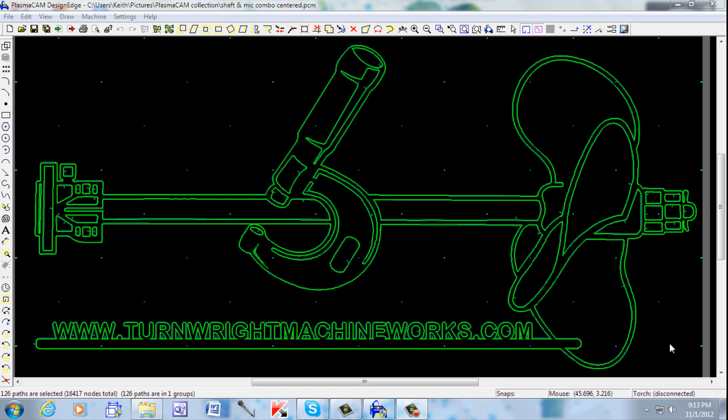Nesting 1, 2, 3. Welcome to my PlasmaCAM screen once again. I have recently acquired the nesting software for the PlasmaCAM to complement the DesignEdge software put out by PlasmaCAM itself. And I'm getting acquainted, getting warmed up to it, and decided to bring you along.

Alright, we're throwing a little twist into the video here. I've actually come out to the shop now and installed my video software on my computer that I control the PlasmaCAM with, so that in the future, when we get rolling on the nesting and an actual cut preview of this subject, I will be able to accommodate that action.

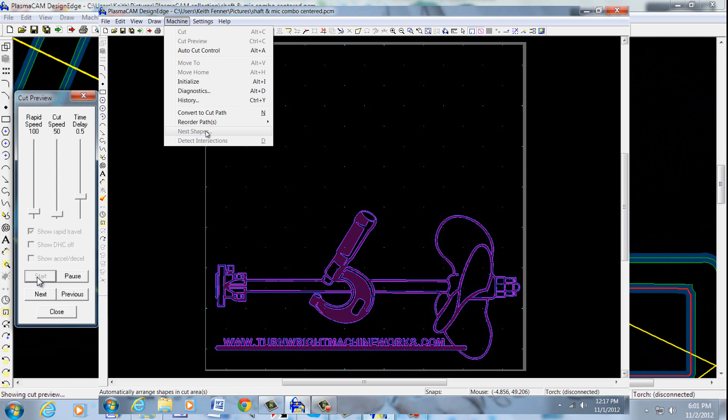Alright, let's get to opening the control panel for nesting shapes. Now you have to have something to nest or to play with before you can actually open up the nesting control. I'm just going to show you this for instance. Up here in the menu, machine, you come down, there's Nest Shapes. And it's not highlighted, and I can click on it all day long and I'm not going to get it open. Alright, but if I pick my cutout here that I have, I come back here and it's highlighted, and when I click on Nest Shapes, the window opens.

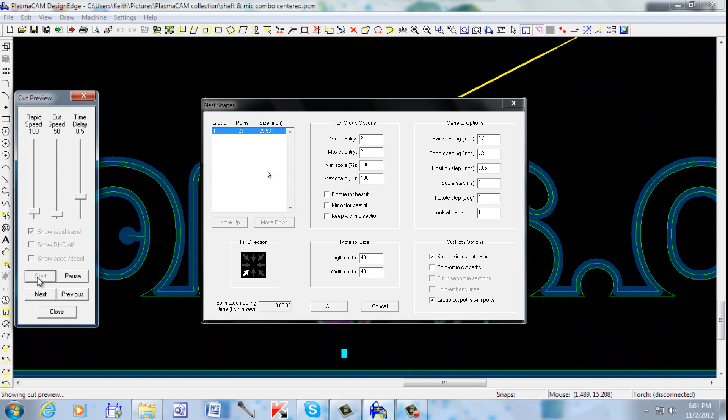Alright, let's cruise the options that we have in the nesting software, and I hope I can get through this pretty soon here. I have a hard time controlling the mouse and running my mouth at the same time.

This window right here is where our items are listed. Okay, now we only had the one item, our logo, to cut out, and so there's only one item that was brought in here when we initiated the program, and it's group 1, and it has 126 paths, and it's 29.53 inches in size. And each item that you choose to incorporate in your nesting project would be here. So if you had more than one, it'd be group 1, group 2, group 3, so on.

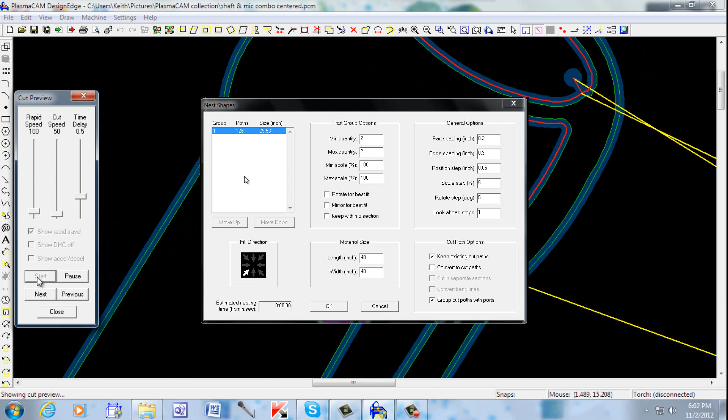And it would fill the box all the way up and down. You'd be able to scroll this depending on how many you got. And it would also initiate the move up and move down controlling. This is pretty much a window that's basically the same as most photo entries into photo galleries on websites and so on. Alright, let's go to the next section here, which would be part group options.

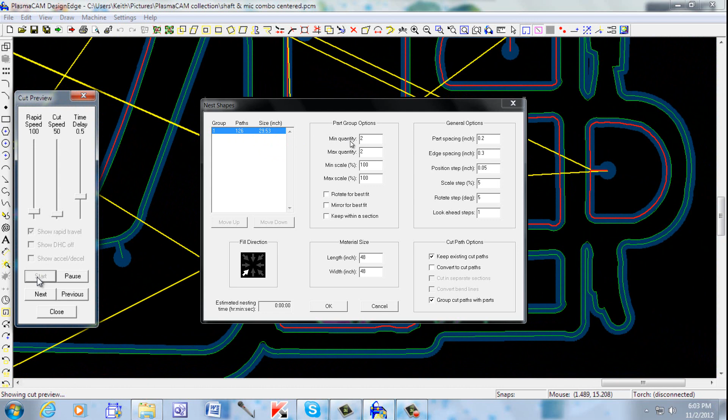And this is the first place you'd go that pertains to the individual highlighted parts or groups over in this window here. So that's highlighted there, and we would put in the minimum quantity. The minimum quantity would be the actual quantity that you would want to cut out of your sheet or your plate or your specific piece of material.

Alright, max quantity would be the most parts that we'd want to be cut out if we had room to cut those out, meaning there's more material than our minimum 2 pieces, so if there's room, hey, why not? Let's go ahead and let's cut 4. That would be an example of max quantity. You got room on your plate, and it's not going to hurt to have a few more pieces.

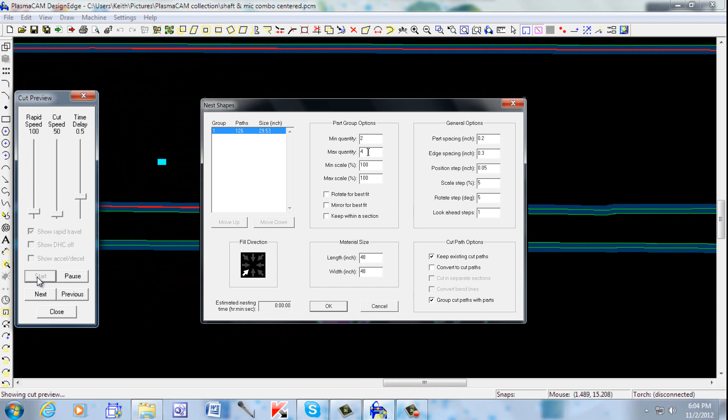Or also, you might have a piece of plate up there, and you don't know if you got this or that amount there, but it's kind of close or borderline, and you can go ahead and set those max quantities a little bit higher, and when it goes through the process of actually organizing and getting it on there, sometimes you can actually see that an individual oddball may fit and may not fit. So sometimes if you're going to be close or borderline, I find that you can go ahead and give yourself a couple more, and they may fit in there even though you may not have thought they would.

Alright, minimum scale would be a percent, and you see the percent symbol there, of the full 100%. 100% listing in this box right here means that you're going to cut it out at your original planned dimensions, as if you were cutting out the single piece on the table all by itself. If you want to keep those exact dimensions, you would leave it at 100.

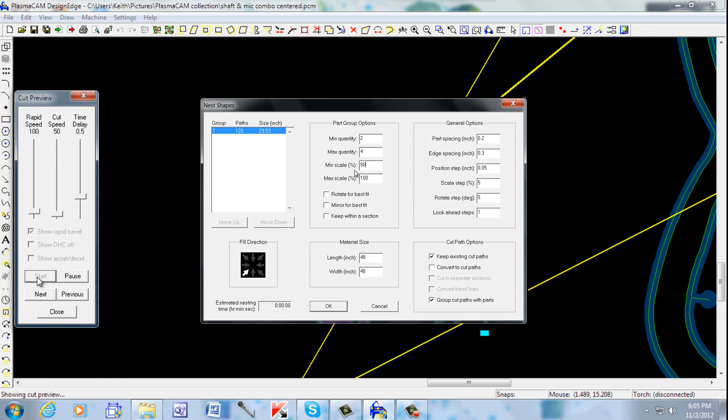But let's say you actually could sacrifice your full scale, and then you could enter, say, 90%, and it would make your parts smaller, and then you may be able to fit exactly what you want. So if you can sacrifice your full scale down, you may be able to get more pieces in that certain area, or if you just really wanted to shrink them down. But I would probably say that minimum scale would be to sacrifice a little bit of original size to squeeze more in on a certain area.

Now max scale would be just like minimum scale, that 100 would mean true size as the original that you are trying to nest.

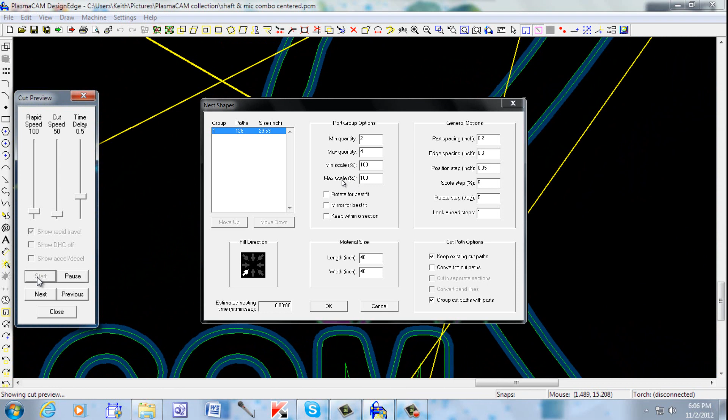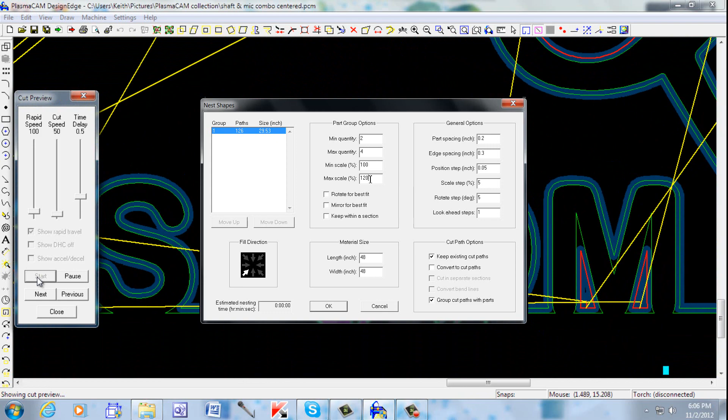All right, and if, let's say you had a single part or multiple parts that you could or wanted to increase the size because you had room to play with, you could make them larger by just going ahead and increasing this to 120% or so on, to suit how much you actually want to grow that part onto the screen. And what's nice is you can type in this, and then you can hit OK, and you can go to your screen there, and you can check all the parameters there as it's going.

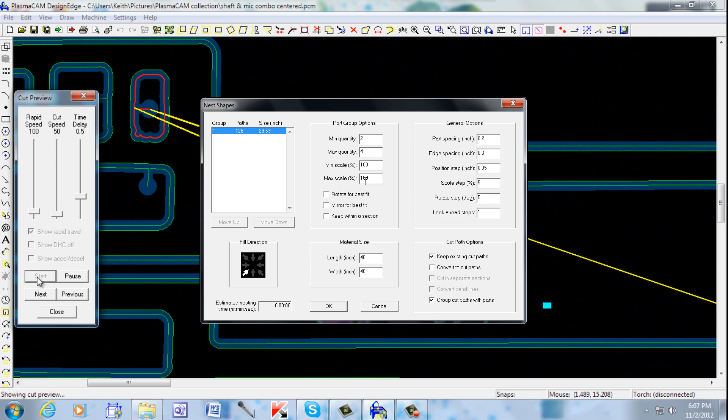But for right now, we're just trying to cut multiples of true parts, and we're going to leave both of these on full scale or true. I'm going to say true scale. We want parts to remain the same as we drew them to begin with.

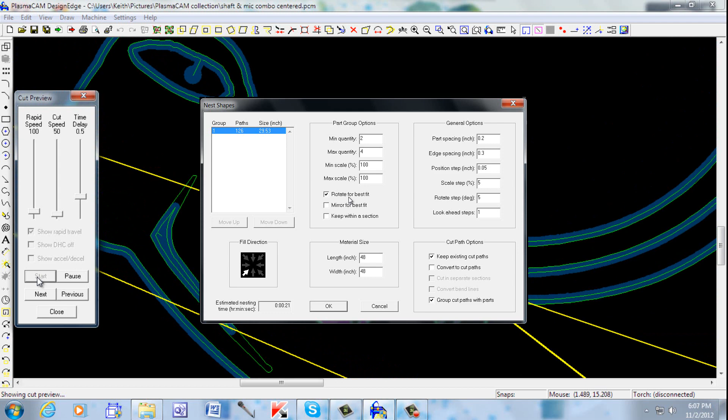Okay, rotate for best fit actually gives the program permission to spin any of your objects, any of the copies of the objects that you have on the flat surface in a direction to interlock them, and it decides its best position to put those so that you are getting the least amount of waste between those parts.

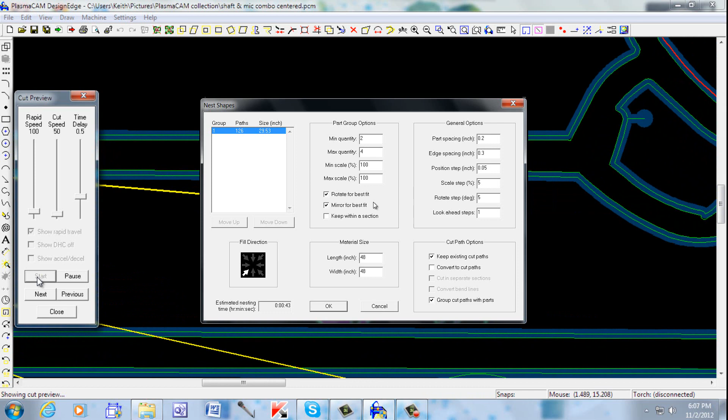Alright, mirror for best fit. When you check this, that lets the program take and flip the part over, basically a mirror image of the original drawing. And some things can perfectly be okay cutting a mirrored object, and when you flip the part over, it doesn't matter which side of the part is up or down, because when you get done cutting it, you can flip it the direction desired, and there's no harm.

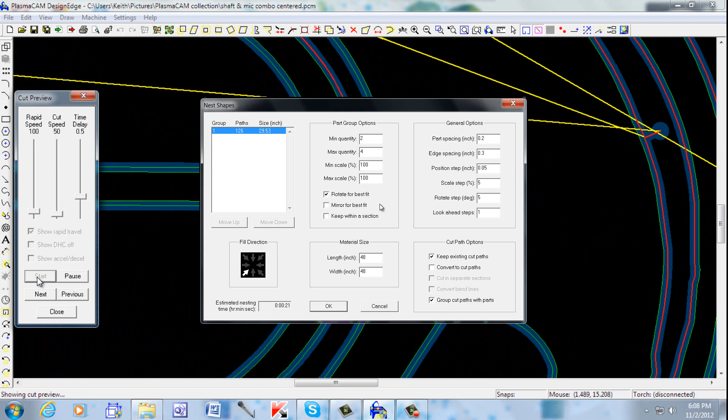Now if you had diamond tread or text or lettering, mirror image may throw a catch in your get along there, and I would advise not to run that highlighted. Alright, just a note, it can save you room and material, but it also can cause you heartburn if you're going to cut an opposite image of what you're trying to cut out of something that's surface sensitive, meaning one side of that plate does have to be facing up.

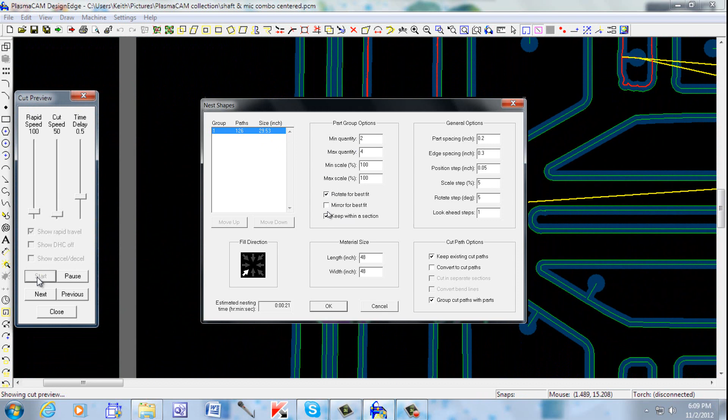Alright, keep within a section. When you check keep within a section, your parts that you have highlighted and your quantities and all the goodies there and how they're rotated and all that will stay within a section. And a section has a couple different definitions to it. Your section could be the 4x8 or the 4 foot by 4 foot table size,

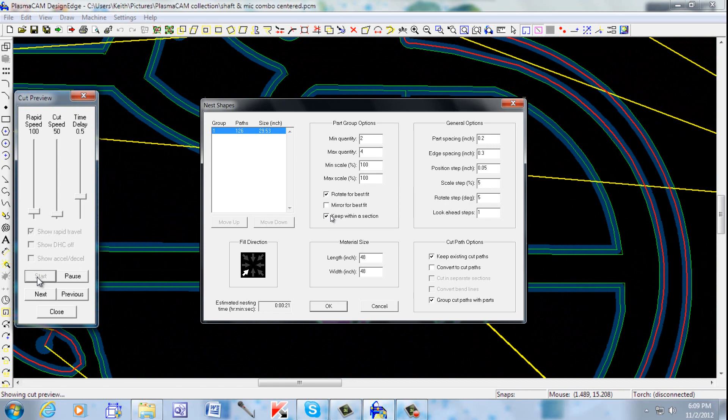and also, if you were to have a void or a cutout in a piece of material, you can put a blockade up, and you can control that section. So when you check this, you will be able to confine it just to a section, and you're cutting parts. You won't be trying to cut parts over voided areas or off the table.

Alright, let's swing over here to the left. Fill direction. Now there's a little arrow down in here, and of course you can click it at any of these areas right here, all the way around in a circle. And these are directions that you can fill, meaning start along that edge, start in that corner, and fill the table from that direction, from the corner out in the direction the arrow is pointing.

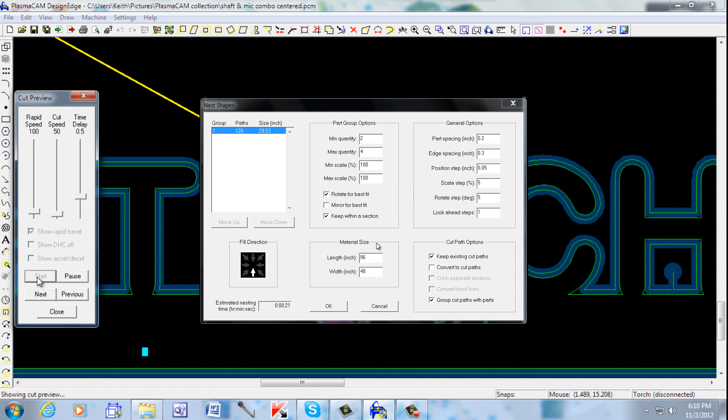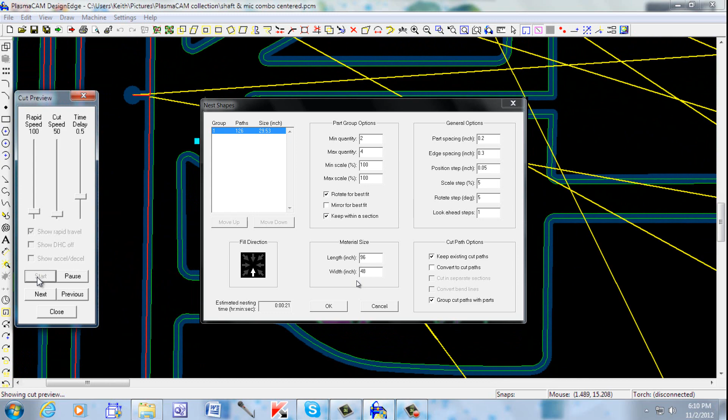All right, let's talk about material size, and you can change this to fit any size piece that you actually can throw on the table. And default had 48 by 96, but I have put a number in there playing around, and I'll be doing that here when I give you a demo on some other parts, that you can confine it to a piece of material, say like a 12-inch wide by 3-foot long piece of material, and you can put that on the table and you could type those dimensions in here, and it's gonna hold your array of parts into that confined area.

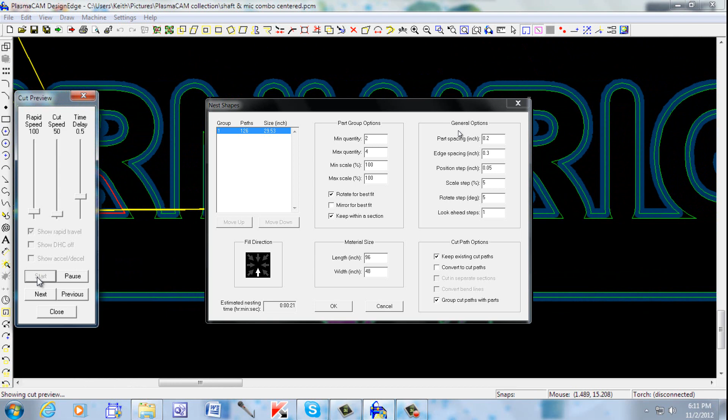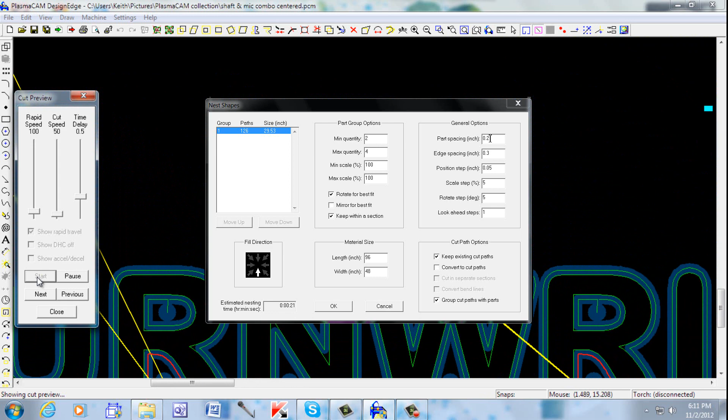Alright, we're up here at general options now, and these are the options that kind of lump all the other parts that are going to be nested into their final resting place. And the first option is part spacing, and this is a default setting of 200 or 0.2. They don't carry it out 3 places, so it does have plus or minus or whatever. You would normally think that way with 0.2. All right, and we will get into close shots on the screen, and I will be showing you what you can expect with a 0.2 dimension there on part spacing.

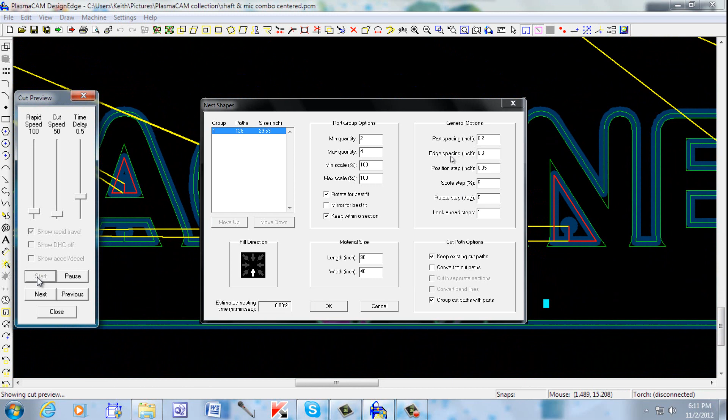Edge spacing, and they have in here 0.3. Edge spacing is the parts away from the edge of the table, or the parts away from the edge of the within a section area, or the material width or size. So the edge of your material into the nearest part, or the first part near the edge, would be edge spacing, and that's 300 thousandths was default setting.

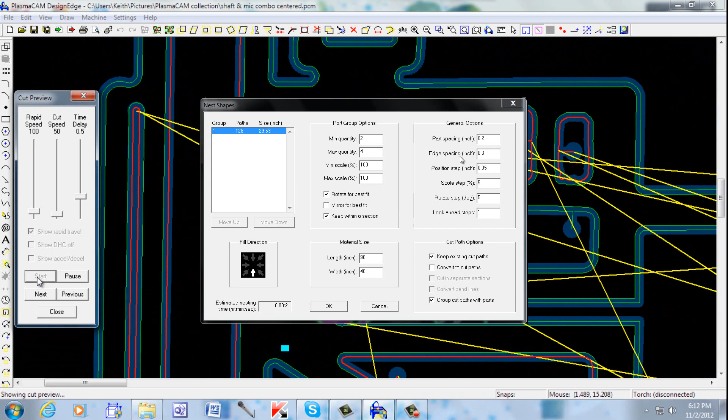Now I'm just telling you that these are defaults. These can be changed, and we'll play with those as we go. But for right now, I learned also to start out playing, go ahead and take a default setting suggestion. It's a good place to start.

Position step, I didn't understand the name, but I did a little bit of research there and kind of moved things around. And basically what I've come up with is this is the dimension of drop between your parts.

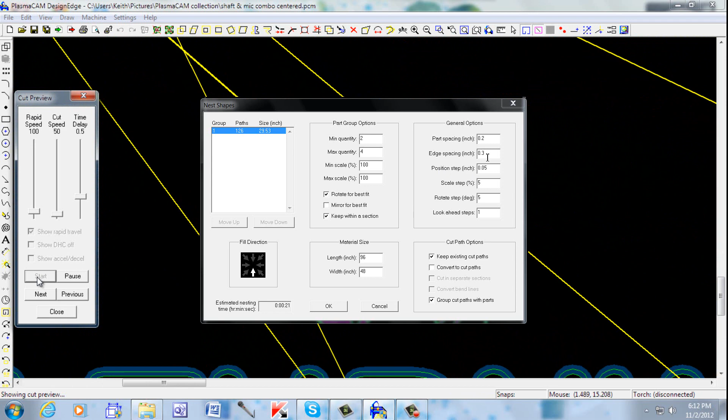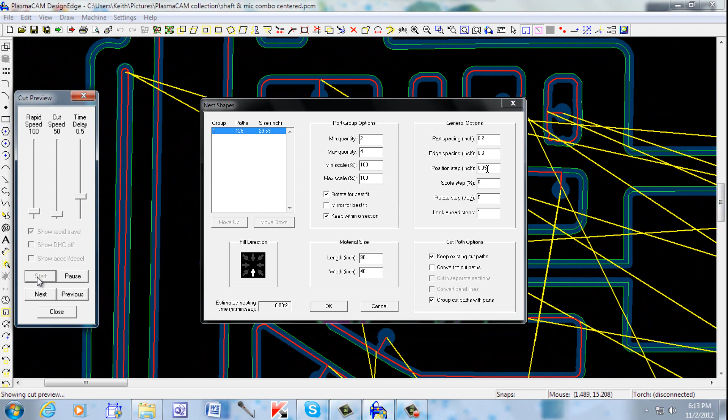So you have 200 thousandths right here of part spacing, but you have 2 paths of 80 thousandths kerf, and what's left over is just about, in true number, 40 thousandths, but this right here is 50 thousandths, but it's only carried out 2 places, so that's probably why it looks more like 40 thousandths in dimensions in the drawings. But if you increase this, you will increase the space between, or your drop of material.

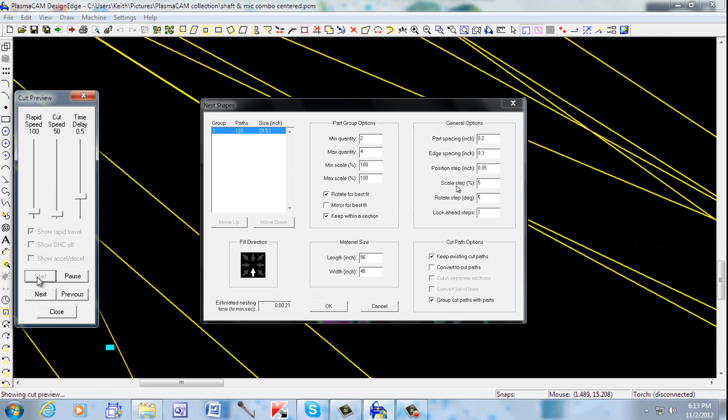Alright, scale step. I think this is an additional adjustment for your scales. You have your minimum percentage and your maximum percentage on your individual parts, and I think this is a percentage of the entire collection that can go through the scale step. I wanted to add just a little bit more of that scale step here for a quick second. I'm not 100% on that, and I will admit to that fact. That is my best judgment at this time.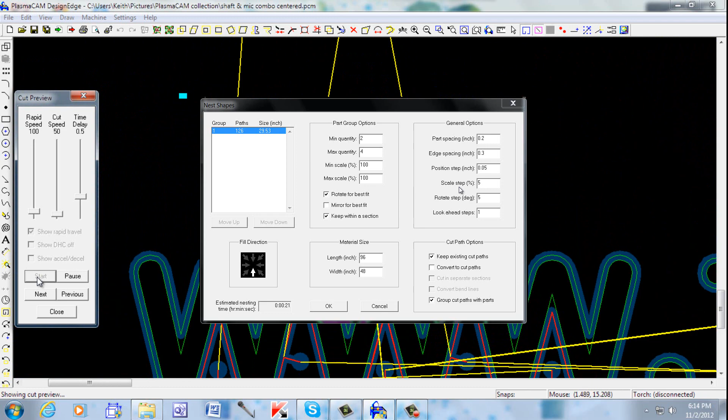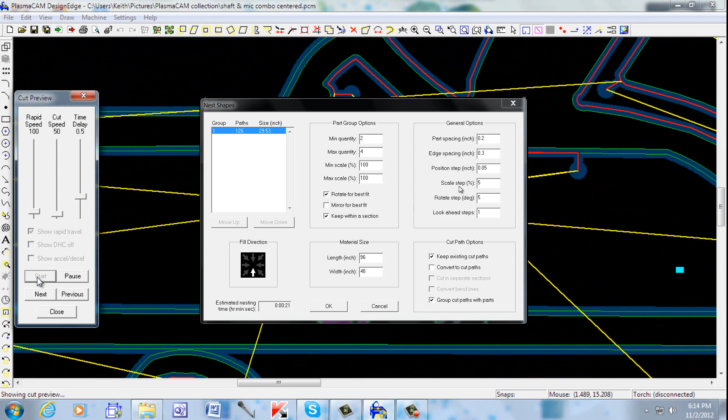As we play with this number a little bit more, we might find out more about it, or as comments come in from software owners having the nesting software, they might pass on a little bit of good information about it. I'm just looking at the default setting, and it was on 5 to start with, and I haven't noticed any difference in dimensions of my parts. So that was where I was using my best judgment call and guessing on this scale step.

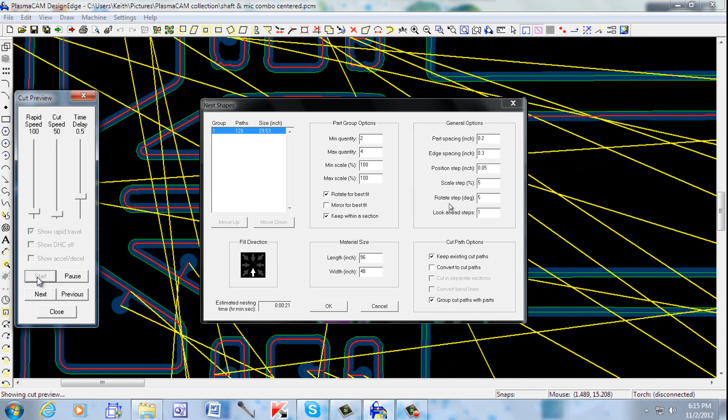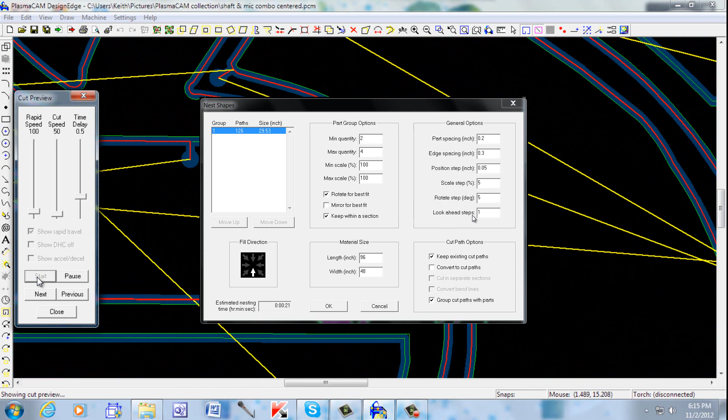Rotate step degree is the allowable degrees that you can set to rotate or angle your components or parts that are going to be cut out. Alright, this brings us down to the look ahead steps, which is my favorite setting in this whole thing. It took me a little bit to grasp this one. The look ahead steps is a setting that tells the program how many scenarios to look for, or how many steps of scenarios to go through to come up with a conclusion for your nesting project.

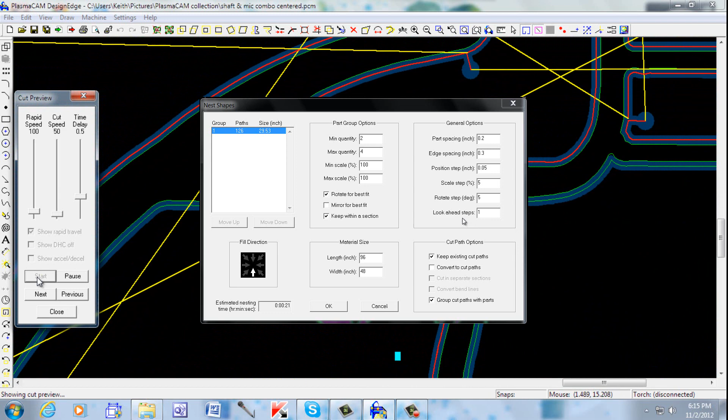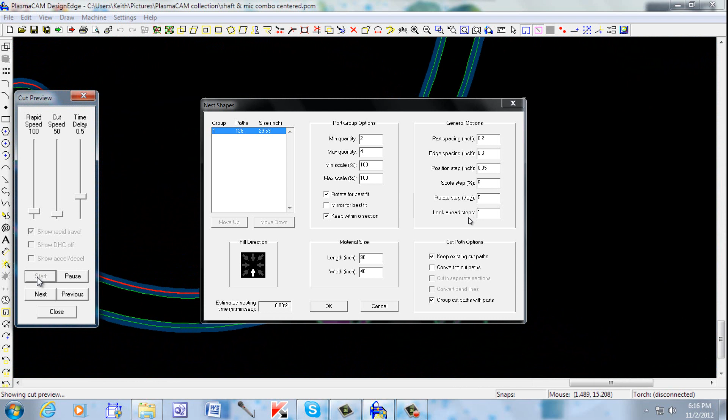Okay, so if you put in 1, the nesting decision might be made in 5 seconds, 10 seconds, 15 seconds, and you put in 2, and then it goes 20 seconds, 30 seconds, and so on. The more steps you have, the harder you're going to work the think process in the software. That's the bottom line, and that's what that setting is about. And you might type in 12 or some crazy number like that, and really let its wheels spin. You better go make a pot of coffee or something. Go get something to do.

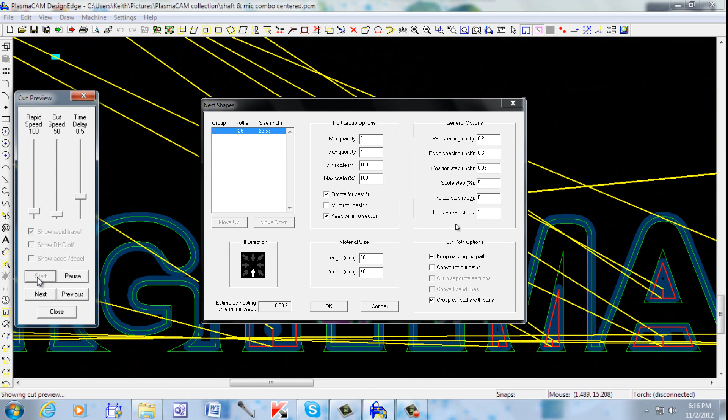Now, also finalizing on this look ahead steps, I think when you program this in and you get the rest of your settings all set up and you've completed this whole form, you'll be able to look down here at estimated nesting time, hours, minutes, and seconds. So it does have a little time meter down here, just so you don't panic, and you have an estimated time to deal with. So you can find out how long we really need to wait.

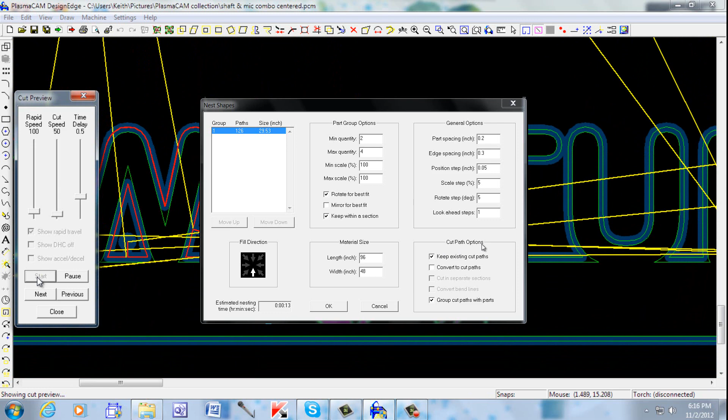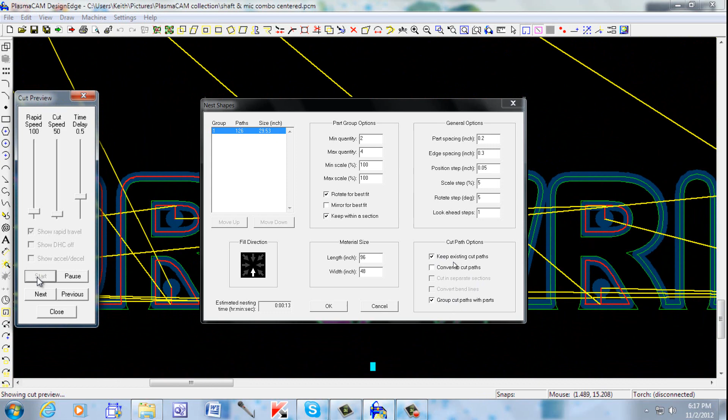Okay, this last section here, cut path options. Now, I'm not going to get into too much of this because it kind of plays out with what you load. I loaded a project with cut paths, and it automatically came up with a check mark: keep existing cut paths and group cut paths with parts. And both of those are smart thinking. No sense in making new cut paths. I have it all set up already, and I want each group or each part to be cut out completely before it goes to the next one. So that's what I have in here now.

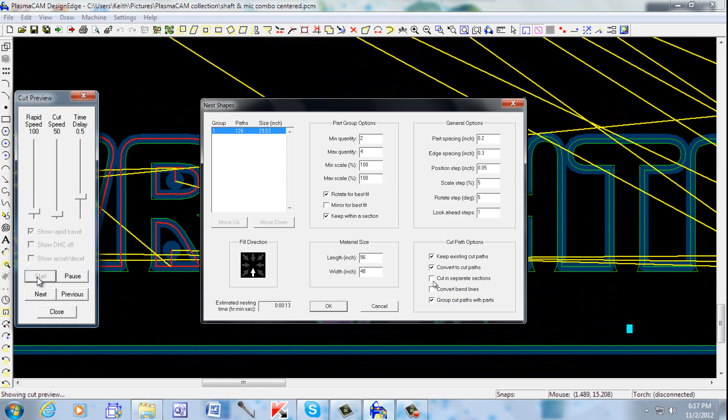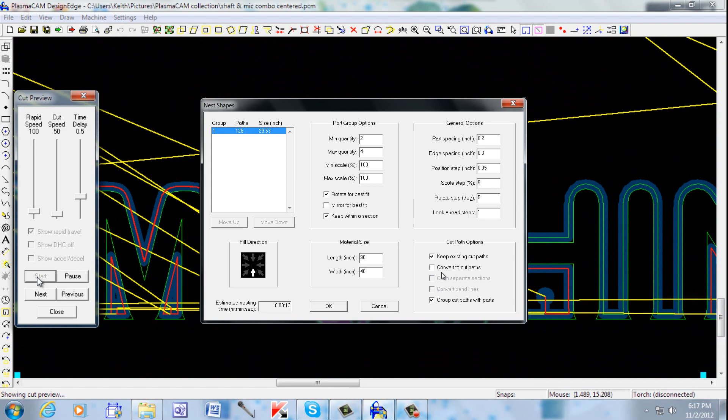Now, if I did convert to cut paths, it opens up the other selections here, cut in separate sections, convert bend lines. I just know from experience that I've accidentally created 2 sets of cut paths before, so I'm going to leave that unchecked, keep it simple and keep what's automatic in here. We'll explore more of what happens in this options window for the cut paths as we play around with some other scenarios.

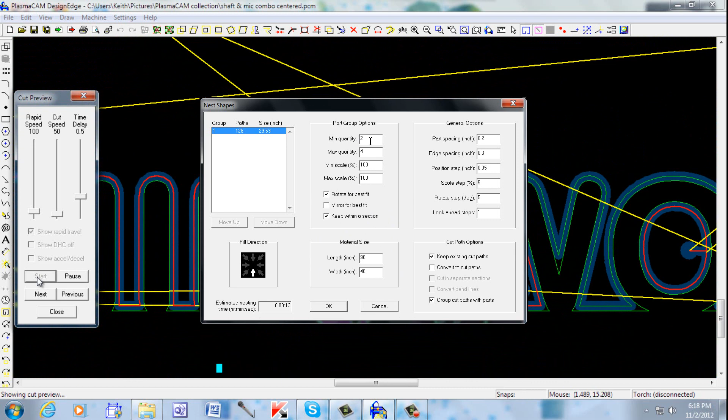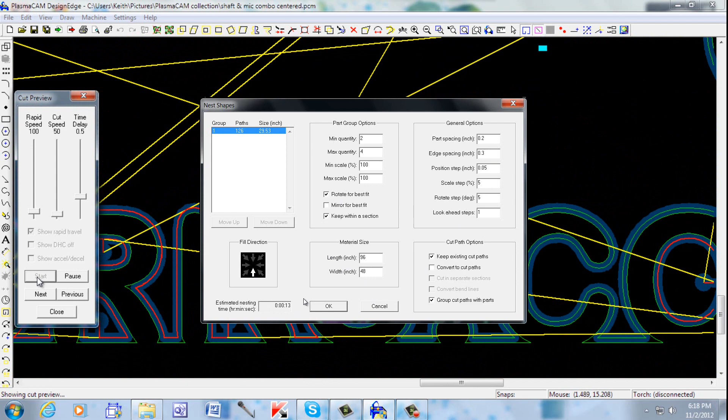All right, for right now, we've clicked a couple of test runs here, back and forth. I had to go do something, so I lost my window. I had to restart it, but I think I got everything back in here the way we were playing. We got minimum 2 quantity, maximum 4. We're running on true fit. We're going to rotate for best fit. We're going to keep within a section. Our length and width are 96 and 48. Everything else over here is the same: 2, 3, 5, 5, 5, and look ahead 1 step. We're loading from that direction, and it says 13 seconds is the estimated nesting time. All right, now we hit OK.

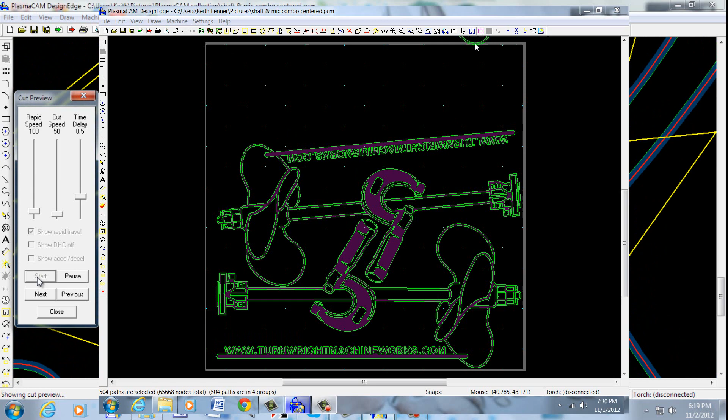Okay, now I've zoomed out so you got the whole window, so we can see what we got. You see the table outline, and you see two parts in here that have been rotated and they fit in there. Now there's a void in an area right here, but the end of the next one and the next one are sitting outside the cut area of the table, because back when we checked within a confined area, the 4x8 is the confined area. That is the size of our cut table, and that sets the parameter of that area.

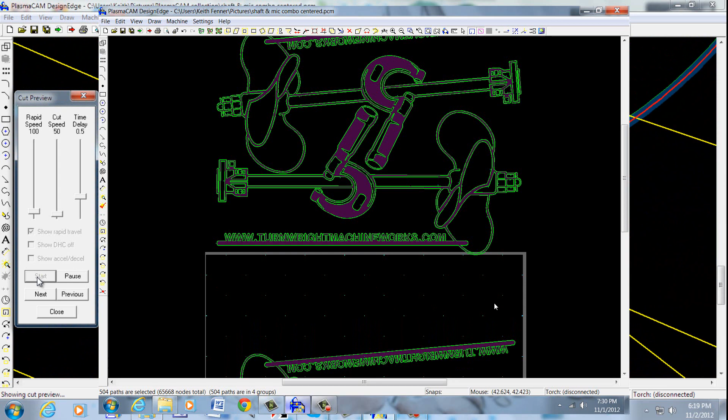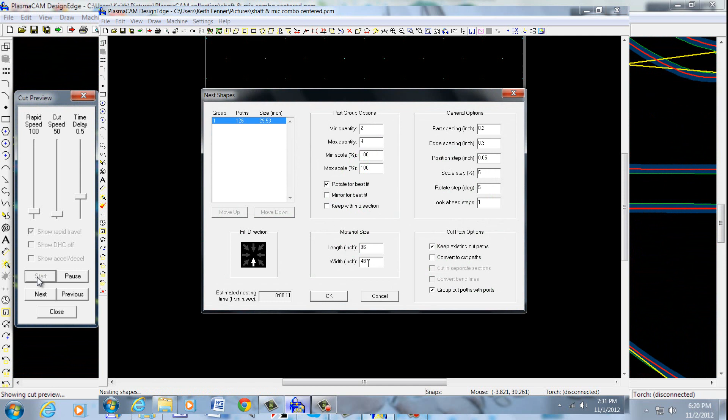And now if we go back up here to the nest shapes, we punch in 2, we punch in 4, we keep everything here. We uncheck keep within section, 96 and 48, and everything else is exactly the same. And now we hit OK. Of course, this drops down in 11 seconds.

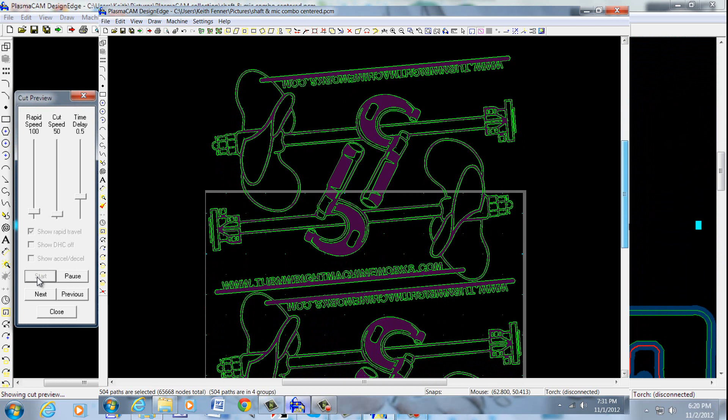All right. Now that we haven't confined it to that one section, it will lay those right out straight in a row. So if we had a 4x8 sheet, we could actually index this sheet and keep cutting them. Okay, so it went ahead and put 4 here, and we probably have room for more. We could probably get a full 5 logos out of a 4x8 sheet. Excuse me. All right, let's test that theory.

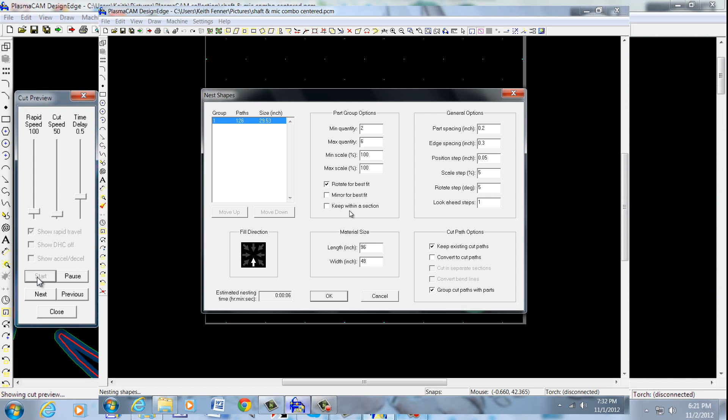Okay, we put in 2. Let's go the max. Let's go 6. Okay, keep within section, no. All right, same size table, and this says 6 seconds. Oh, and then it clicked to 12 right at the end there.

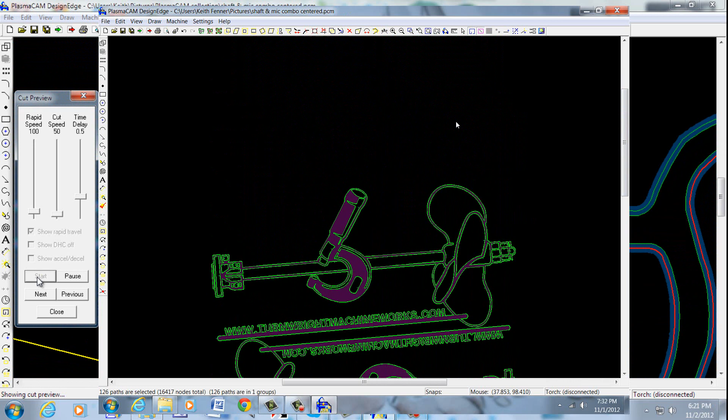All right, 1, 2, 3, 4, 5. Okay, I wouldn't put the 6th one on here because there is no plate after that, because our material is only 4x8. Okay, enough of my artwork. Let's get into another project here.

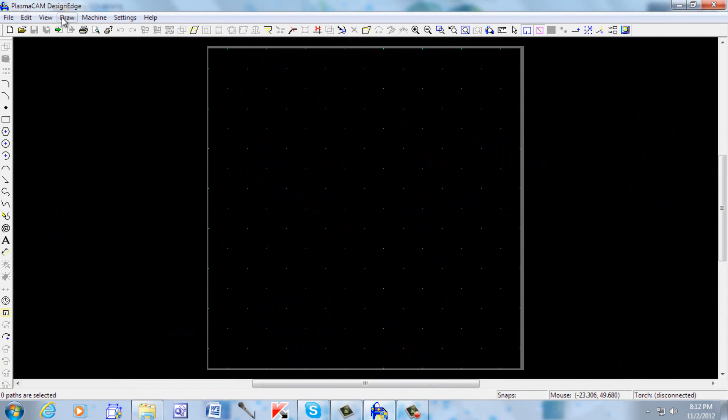Let's say you're doing production and you have a certain amount of parts you want to get on the table and get going. So let's just put up some shapes here. And this undercut flange is a good one. I like that. I'm going to set these just off the table. How's that? No reason, just want to have them out there. All right, oval. Let's make this a little bit bigger. About a 1x4 oval.

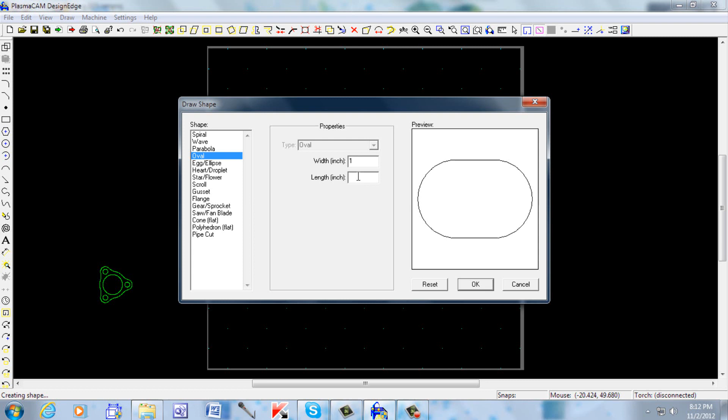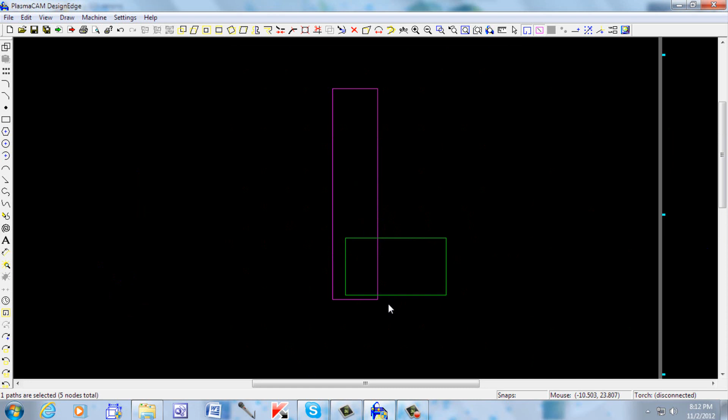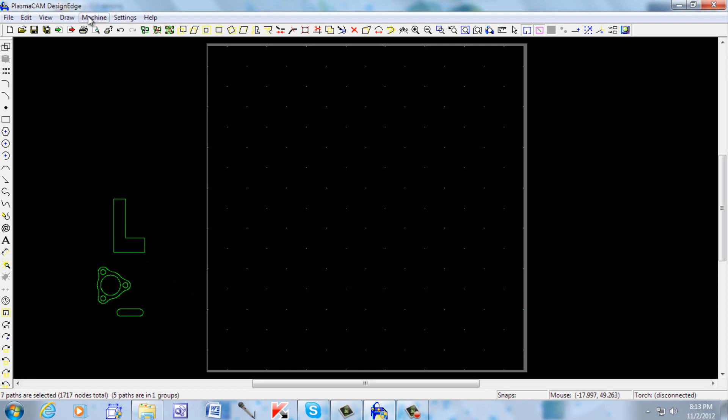All right. Now let's just draw an odd L shape here. Something like that, and another square here like that. Let's zoom in. We're going to move that one like that. All right, zoom out. We're just going to marry those so that it makes an L. Okay. Let's say that those are our items that we're going to nest. Highlight them, come up here, go to nesting. The reason why I put them over here is so that they weren't under my screen.

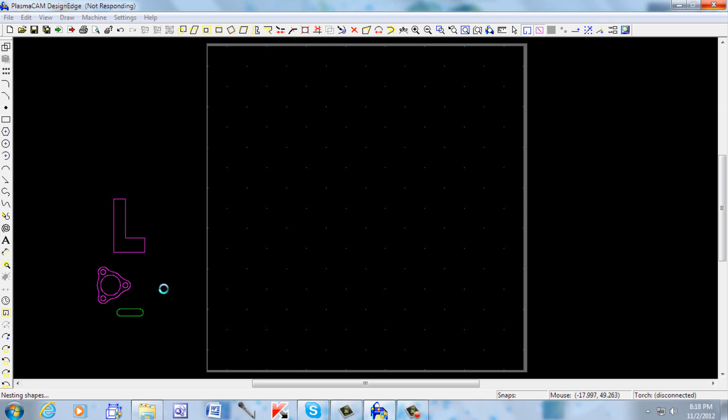Wow, that looks awesome. Dang. Alright, there's our nesting project that we just quickly plugged in there, and it laid out that project for us. And that's one example. I'm going to be covering quite a few more examples, and I'm going to play with it and get a little bit more experience with it. And I hope I'm pretty much right on my description for the controls. And if I'm not, please jump in there and correct me or add to what I've already stated.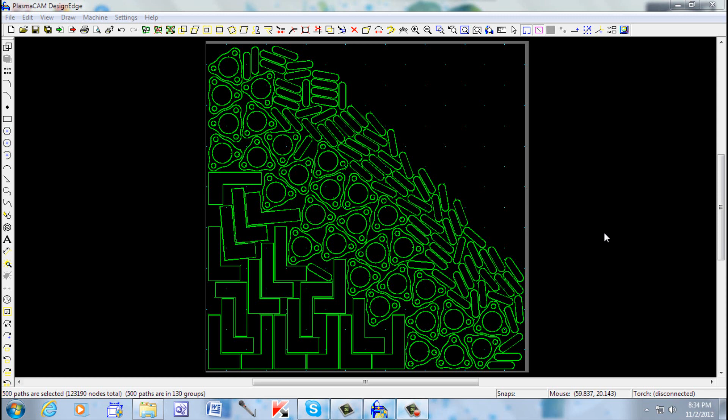And also, if I find out that I made a bad call on any of my descriptions there, I will bring that up on part 2. I'm going to play around for probably a week, maybe 2 weeks, and then I'm going to come up with a part 2 nesting project video for you.